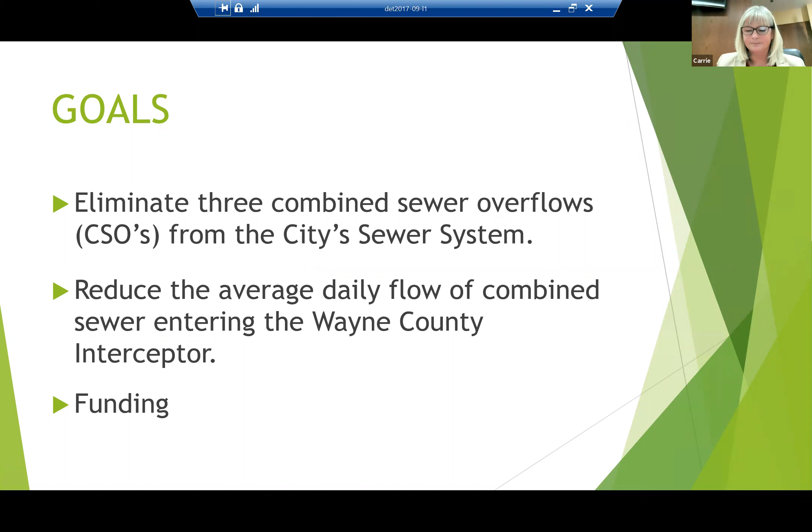So just a quick summary of what we're going to talk about. I'm going to give you background on where we are today and how we got there, the need for the project, how we analyzed it, the results of our analysis, and the couple of alternatives that we came up with. And then the state requires us to cover environmental impacts as part of this submittal to them to request funding. I'll go over the funding briefly and also the schedule.

So as you know, and as Jerome explained, the city has a network of sewer pipelines. This shows them in general throughout the city. We have both sanitary, which only contains wastewater. We have storm drains, which are shown in green. The sanitary are shown in gold. The storm only contains stormwater, and then the combined system, which is shown in purple.

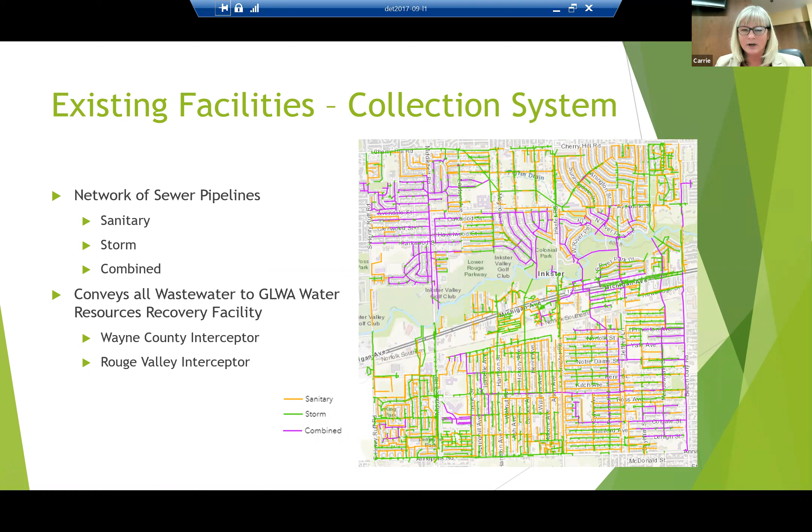All of this network is interconnected and deposits all of the wastewater into two interceptors that run through the middle of the city. Those interceptors are owned and operated by Wayne County, and we currently have an agreement for both of them. The interceptors convey all of this flow to GLWA's wastewater facility, or Water Resources Recovery Facility, which is the wastewater facility that treats the water and then releases it into the Detroit River.

The two interceptors, as I mentioned, are along Michigan Avenue and the lower branch of the Rouge River. The blue one shown here is along the lower branch of the Rouge River, and it's referred to as the lower Rouge interceptor. It's a 60-inch diameter main or interceptor. And the other one shown in purple is an egg-shaped interceptor located in Michigan Avenue, generally speaking. It's about 36 inches wide by a couple of feet in height.

Carrie, can you hold right there for a second, Carrie?

Wayne County, for the interceptor shown in blue, states that there's a maximum flow that the city of Inkster is allowed, and it's a flow rate. And occasionally during high rainfall periods, the city exceeds that rate. And so the county is looking to Inkster to reduce that rate, as well as the state has also requested that the city reduce that rate.

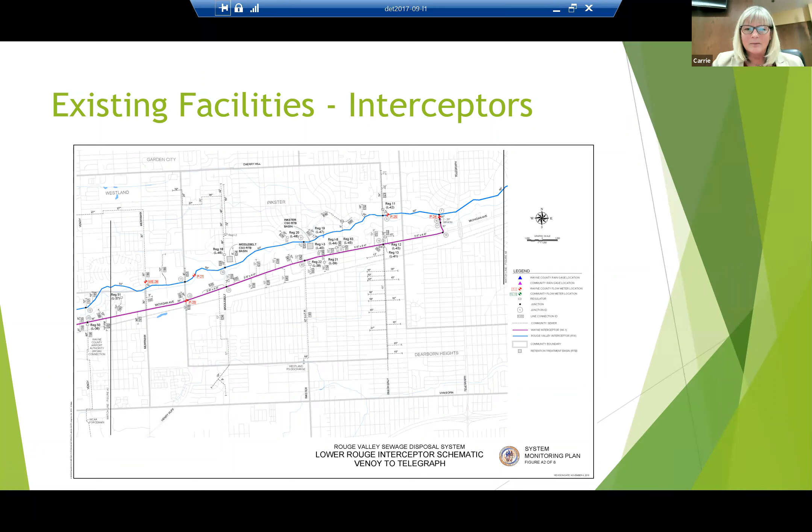Carrie, can you pause right there for a second for me, please? So just to give you a little more background, the city experienced a building boom in the 40s through the 60s. Hey, Carrie, can you hear Mayor Wimberly? I don't think she can. I think she got her volume down. Is anybody at City Hall that can walk out and tell her? I'm about to call Jerome. I'm about to let her know now. Oh, I'm sorry. No worries, Carrie. We appreciate that.

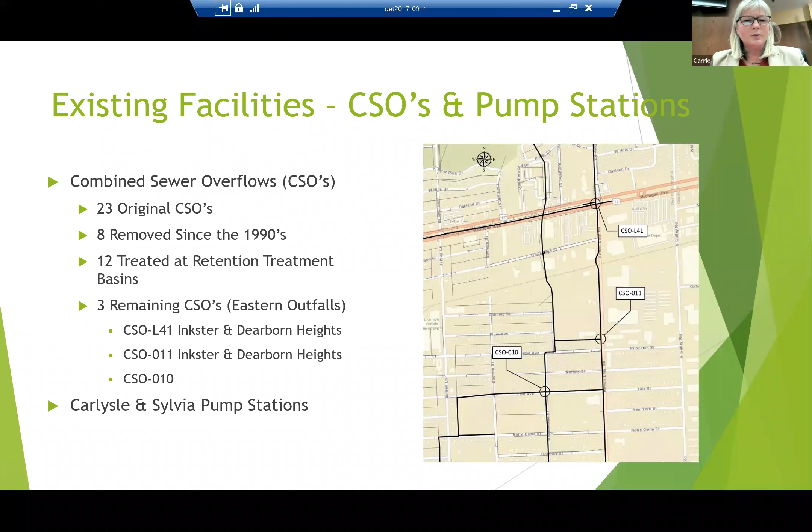Just wanted to describe briefly how the city was developed and explain that a lot of the sewers were built in the 40s through the 60s. During that time, there was a boom. And also during that time, the way the sewers were designed were for regular flows from wastewater and industrial waste, as well as an average storm that you would experience in a 10-year period. So when you had larger storms, the system was designed to export that overloaded capacity through outfalls.

And the outfalls were usually along bodies of water. In the case of Inkster, that's the lower Rouge River. So the network was designed with 23 CSOs, or combined sewer overflows. So when it reached capacity, all 23 of these overflow points would flow into the Rouge River, and that included sanitary sewer as well as storm sewer, sewerage.

Since that time, through the Clean Water Act and people wanting to clean up their environment, those CSOs have been reduced. 8 of them were eliminated and 12 were rerouted so that they could get treated at the retention treatment basins located on Middle Belt north of Michigan Avenue, and also there's one on Inkster north of Michigan Avenue. So that water goes there after a big rain. It sits and gets treated, and then after a lot of the flow from the big rain event subsides, it's released into the Lower Rouge River, so it doesn't have as great of an impact on it.

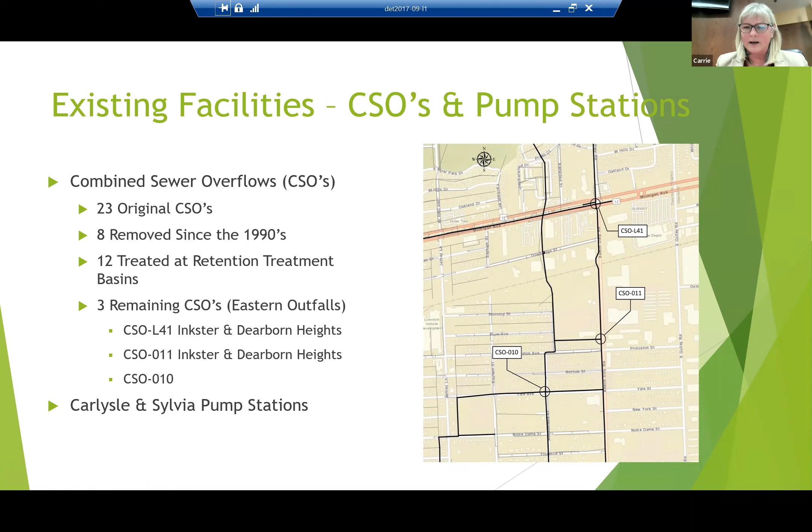I also want to mention the Carlyle and the Sylvia pumps. They're also in the study area where all of the sewage is taken from and directed to the interceptors. And then in the case of a big rainfall event, that overage of flow is directed to the Rouge River.

So just to specify, there's a couple of needs for this project. Obviously, one is water quality issues. Raw sewage into open bodies of water is, of course, a water quality issue. In addition to that, there's also an administrative consent order. In 1988, the state, or EGLE as it's now referred to, ordered the city of Inkster to reduce the amount of flow that goes into the interceptors by separating out the storm and directing that storm flow somewhere else, so they're not treating storm flow, to reduce energy costs.

And then also to either treat or eliminate the CSOs so that raw sewage wasn't going into open bodies of water. So we can either eliminate those, or those can also be directed to these retention treatment basins that exist here now. We also took a look at projected needs. We noticed that in areas of the city the capacity of the sewer pipelines was inadequate. So from that perspective, there just needs to be an upgrade to some of those facilities.

And then as part of this requirement to obtain funding from the state, we need to take a look at what the situation is if this project was never done, or no improvements were made to the city. And of course, that results in what is happening today, which is the city will continue to discharge raw sewage to the Rouge River if we don't take care of it.

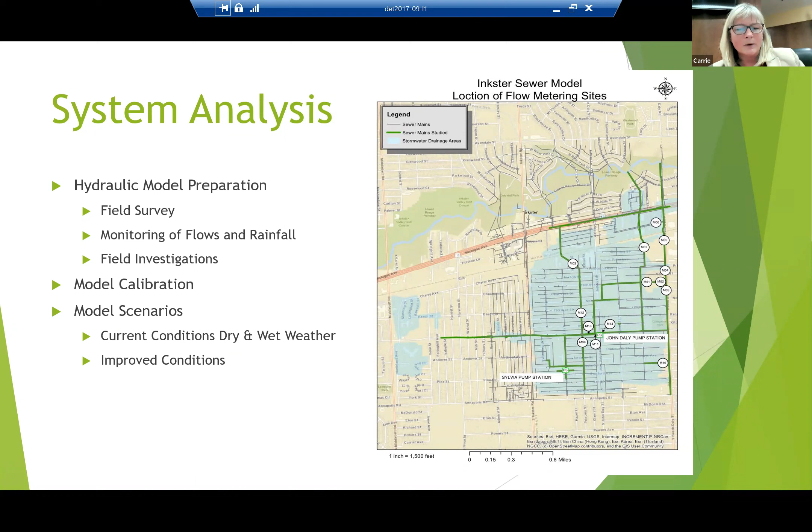Once we created the model from field visits, identifying manholes and the distance between manholes, the sizes of the pipe and the elevation difference at each end of the pipe, we created the network and then used that flow information to calibrate the model and have it run as close to what is happening as possible. Then we took the model and ran a few different scenarios. We looked at current conditions during dry weather, and also during wet weather. And then we took a look at improving some of the conditions.

So before I go through the improvements, I just wanted to mention 3 things that we were able to determine using the model. We identified certain areas, kind of in the Yale, Notre Dame area and Princeton to, I guess, maybe John Daly, where sewers were undersized and meeting capacity with just dry weather flows. We were also able to identify the ranges of the flows at each of the CSOs where they start actually discharging to the river.

And that was helpful in sizing pipes both downstream and upstream of those locations. As I mentioned before, when the CSOs overflow, they go into a large main that's located in Meadowdale. And we identified the fact that that pipeline was being underutilized and thought it might be better utilized if we were able to separate some of the storm from the sanitary and then send the storm water down that pipeline to the creek so that we would only be discharging stormwater instead of a combination of storm and sanitary sewer.

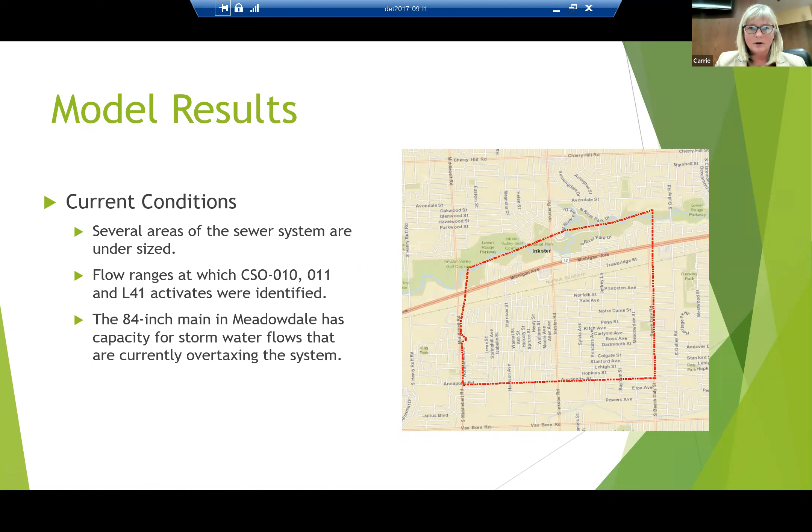By doing that, we're able to reduce the sanitary flows that go to the interceptors and reroute those storm flows into that large 84-inch pipe that I just mentioned so that they can be discharged into the creek. It reduces the amount of flow to the interceptor, but during wet weather events, there still is some overflow from those 3 CSOs. But we found that we would be able to redirect those flows to the retention treatment basins at Inkster.

Because by taking out some of the flows in enough locations, we're not only reducing the combined flow to the interceptor, we're also reducing the combined flow to the retention treatment basin. So that frees up some capacity so that we can send combined sewer flow there when those 3 CSOs overflow. So both of these improvements, option 1 and 2, reduce the flow to the interceptor, eliminate CSOs, and reroute combined flows to the retention basins at Inkster.

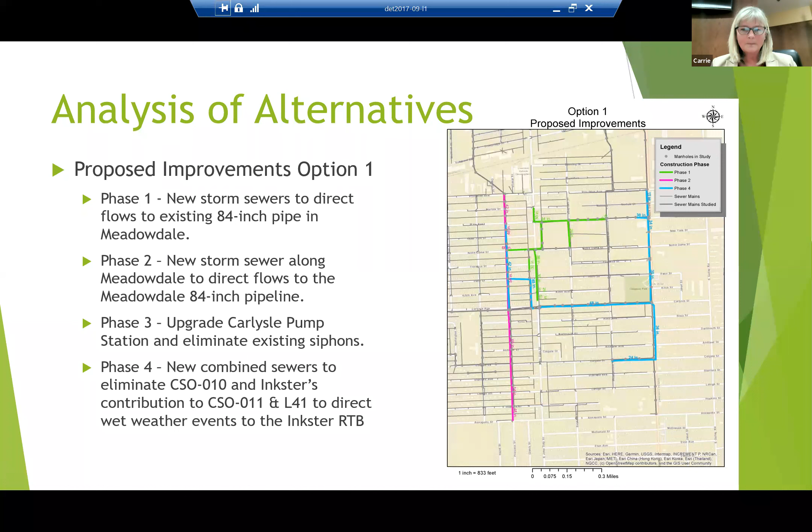The difference between the 2 options, and I'll go to the next slide, is that alternative 2 includes additional pipelines that would separate storm and sanitary and direct some more of the wet weather event to the creek or the river, the Rouge River, and free up a little more capacity at the retention basin located at Inkster and Michigan Avenue.

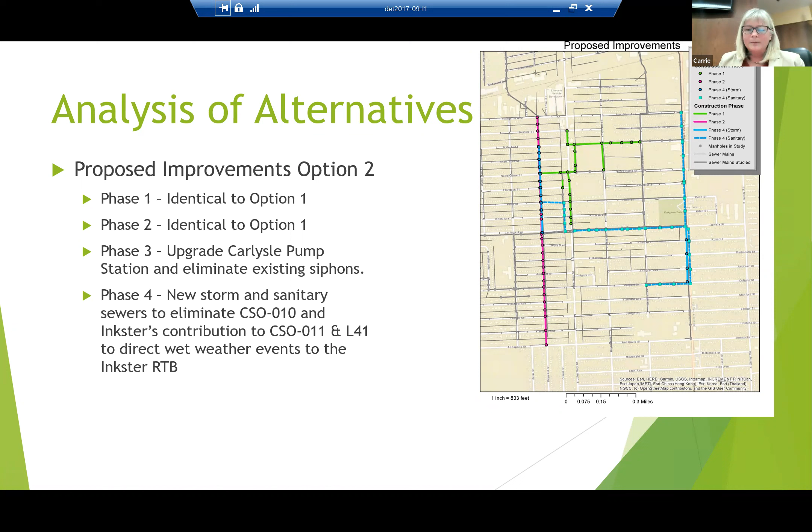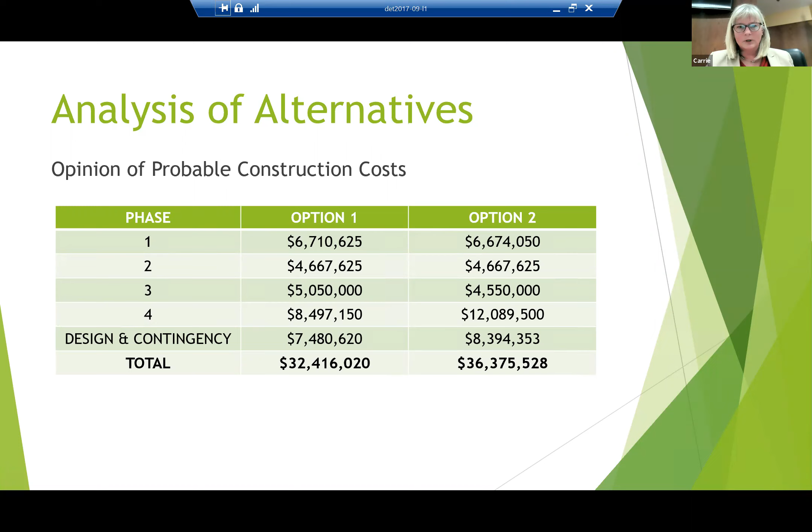So the other big difference between these 2 alternatives is, of course, the cost. Both options achieve the same objectives. Option 2 is about $4 million more expensive because we're separating additional combined sewer into sanitary and storm. So you're talking about extra pipelines. We have selected, of course, the lower cost option because both options address all of the objectives. We feel spending less money is more prudent for the city, to use that option instead of the more costly one.

We also looked at short-term impacts, and most of those impacts are associated with construction. We needed to address those. So here are the mitigations for the short-term impacts to the city and to the study area in general. Noise, of course, dust, traffic, soil erosion, sedimentation control, and odors.

Odors may or may not be something that we have to deal with, but if we do have to deal with it, it will basically be pumps that need to pump sewage around areas where we're working on pipelines that can't take the capacity. We'd be careful about where we would locate those, try to locate them away from residential areas if we could, and possibly screen them if it's necessary and if it would help with the odor.

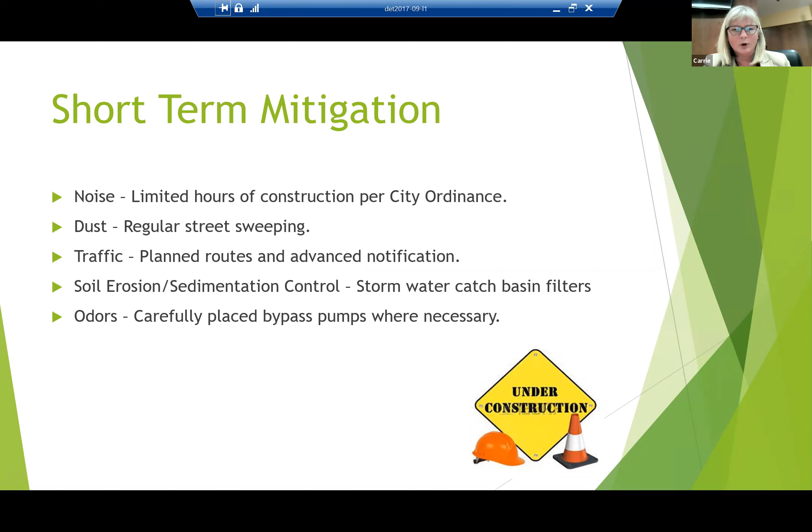So funding, we are requesting clean water state revolving funds. There was over $290 million issued that the state is providing to communities who turn in this information like we're doing today, so that they can obtain a loan to complete projects that would improve the environment through clean water measures. So this loan that we're applying for is for 2022. Of the $32 million project that we were looking at, the loan would apply to phase one of that project, which is a $6 million portion of it.

The schedule right now is that once we finish this meeting and I answer all the questions, we include answers to all those questions, as well as some questions that we received from the state after they reviewed the document. And also a transcription of this meeting goes into that document, and then we turn it in on June 1st to the state, or EGLE. Then we begin design when the fiscal year starts in July.